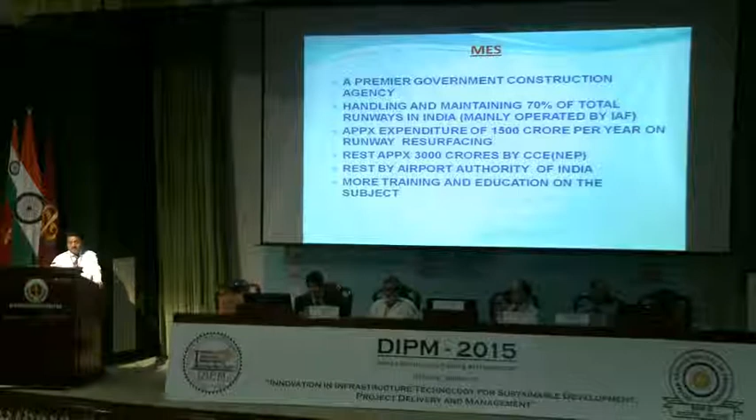I will just inform you that Panagarh, when I was posted, I actually never wanted to go there. But after reaching there, I could find out that it's a beautiful runway which was available there. But before covering my case study on the runway resurfacing work, I will cover MES and the runways.

MES, as all know, is the premier government construction agency. But as far as runways are concerned in the country, mainly there are only two government agencies executing runway resurfacing. One is MES, of course, and the second is Airport Authority of India. Almost 70% of the runways being handled, operated by the Indian Air Force, are with MES. That is 100% of the airports operated by the Air Force, 70% of the total Indian runways available. Rest are being done by Airport Authority.

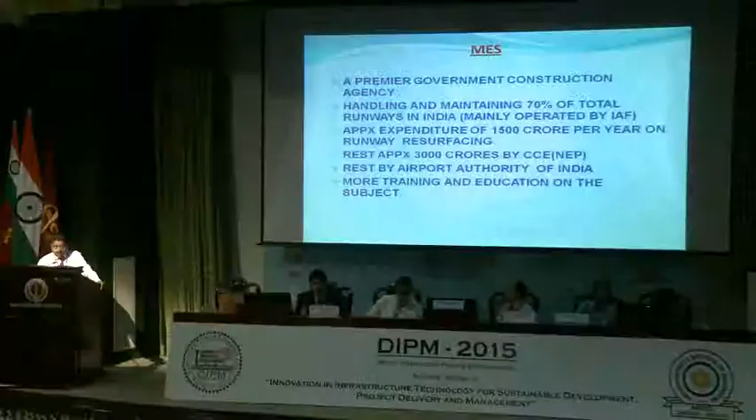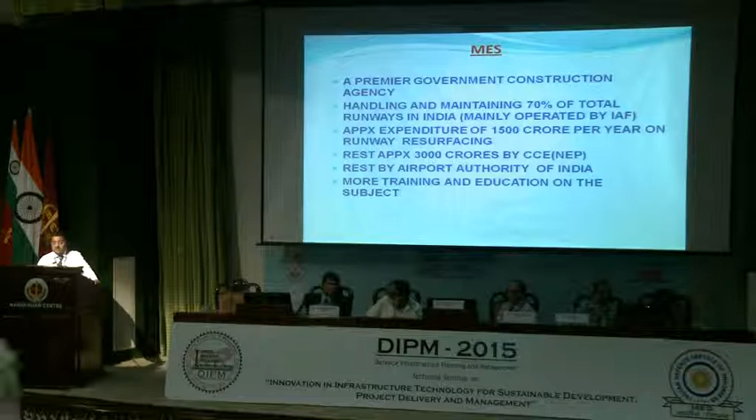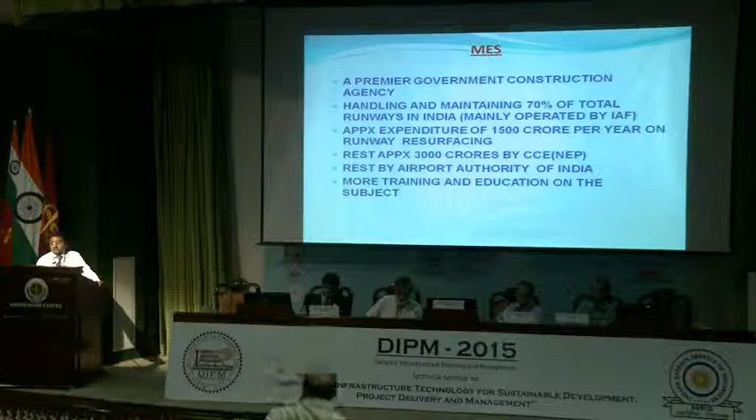But in the department, very little training and education is there for the executives, staff who are doing the runway resurfacing work. I am also not educated in the highway field, but got the experience because I had executed runway works in Ambala and now in Panagarh. So 2 runways I had already executed as GE, and 3 runways I had supervised as an officiating director design in WC Palam. Now coming to the project, which will be of quite interest for you.

First of all, the Panagarh Air Base, which even the name was not heard by me till the time I was posted there. This runway was constructed by the British and the US in World War II and has been used thrice during World War II and thereafter in 1965 and 1971, the wars against China and Pakistan.

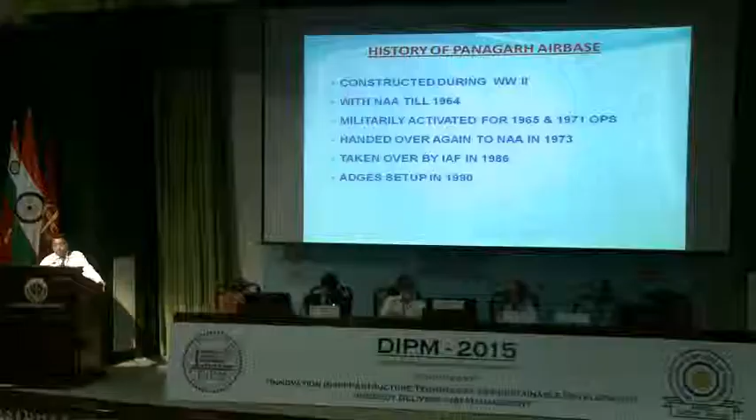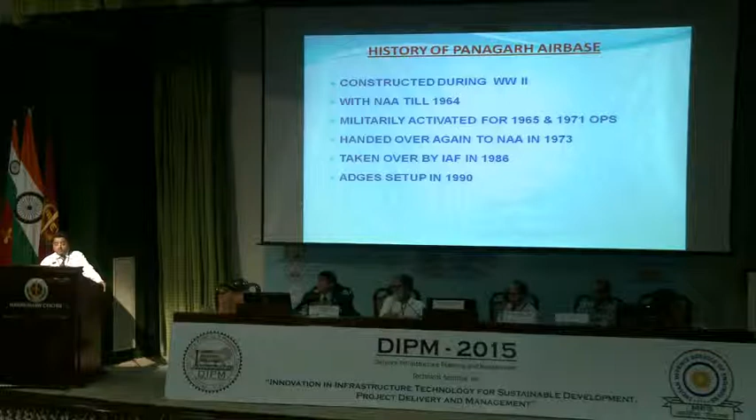The airport was taken over by National Airport Authority and Indian Air Force quite a few times, twice or thrice. Finally, in 1990, the ADGES setup was there, wherein all the runways of Indian Air Force are connected. And since 1990, Indian Air Force is operating from the base.

Coming to the project, it was sanctioned in January 2013 for an amount of 87 crores and completed in July '15 for an amount of 80 crores, in a total time period of about 2.5 years, out of which real execution time has been only 10 months. Rest was planning, taking decisions, changes between the Air Force, the MES and the contractor.

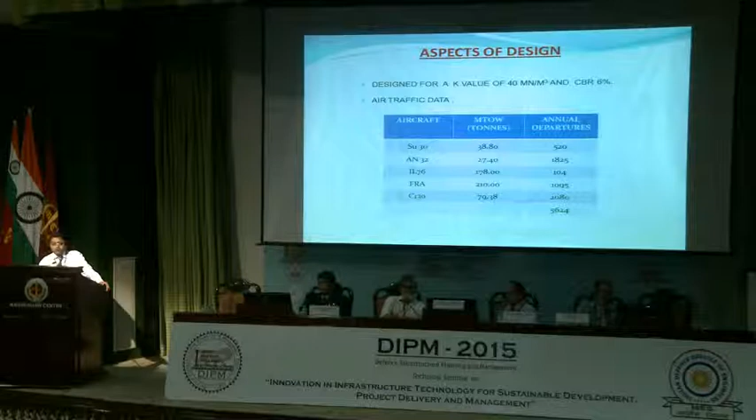Coming to the design aspect, this runway has been designed for the heaviest aircraft available with the Indian Air Force except the C-17. As you can see, the C-130J, the Hercules super aircraft, which is a multi-role aircraft, will be operating from the base.

Hercules C-130 has got only 2 bases. One is at Hindon, and the second one, now in 2017, would be Panagarh. Another 6 aircraft are being procured by the Indian government.

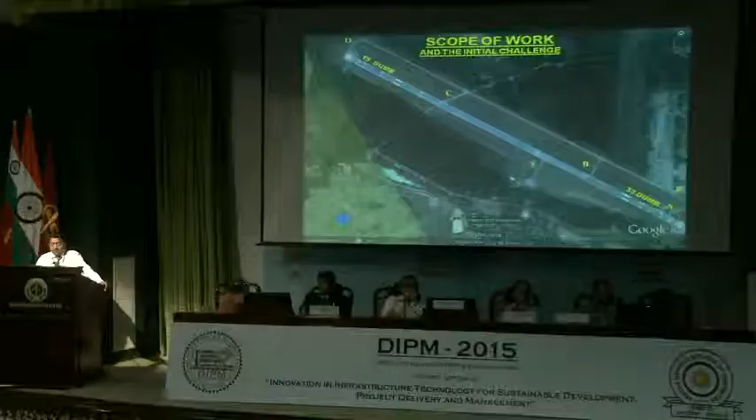Coming to the scope and the initial challenge, why there was delay initially in planning and starting the work. As you can see, this is the profile of the runway. This is the 15 dumbbell and this is the 33 dumbbell. For the knowledge of all, 15 dumbbell means it has got 150 latitude when the aircraft operates from this end. Meaning if the runway operates from 15 and moves towards 33, this line will make an angle of 150 degrees from the north of the earth. So that is how the nomenclature of runway ends are there.

This runway in 1942 was constructed with rigid pavements only; the whole surface was concrete. But as per our Indian Air Force requirement, the center portion of 2134 meters, that is 7,000 feet, was to be overlaid with flexible overlay. The rest of the two ends were to be overlaid with rigid construction, that is PQC, concrete construction. A further 900 feet were to be constructed new, with rigid ORA, and all other taxi tracks and links were to be laid flexible again.

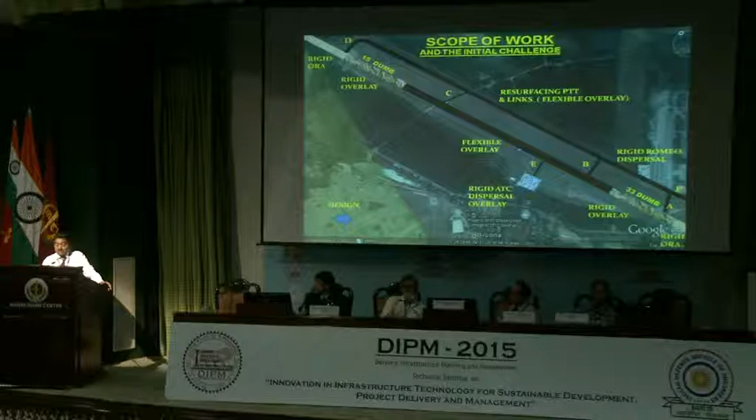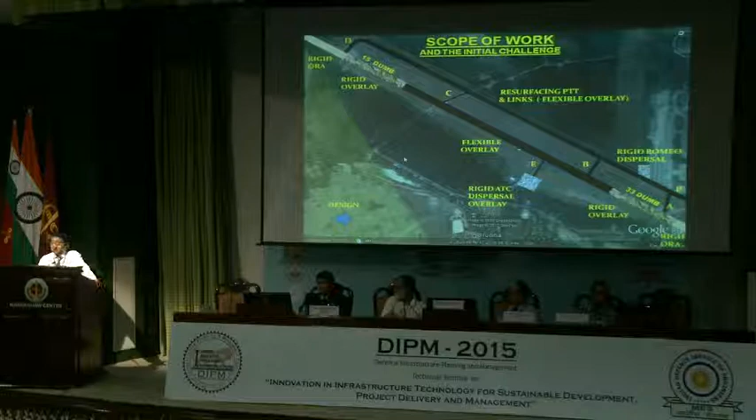And the two dispersals, Romeo dispersal and ATC. This design was done based on the traffic data given by Air Headquarters, by CCNEP at that time, and vetted by the Pavement Directorate of the E-in-C branch. I won't go into the details of the design because it will again become boring for you. In this, the initial challenge — I'll talk about all the challenges which came our way and how they were overcome.

There were small things, there were big things, but here is how they were overcome. First of all, the initial challenge which came before starting the work was about level.

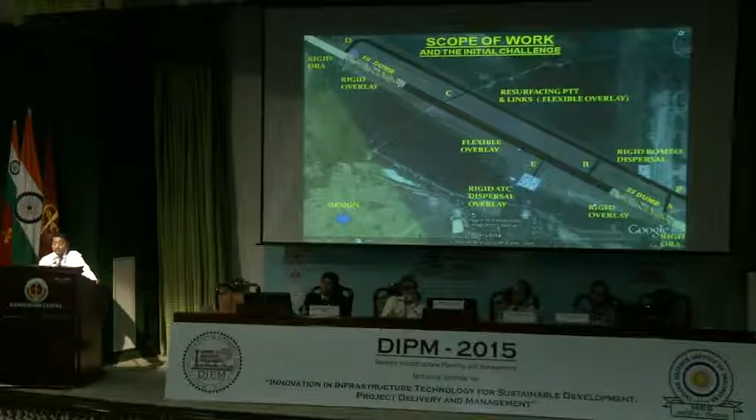The runway, when the leveling was done using a total station topographical survey at a grid of 2 meter by 3 meter, it was found that about 40% of the runway's length, from Echo Link up to the 33 end, around 1400 meters or so, was sloping towards one direction only. This was not allowed, as per ICAO guidelines of the International Civil Aviation Organization, the runway should be symmetrical on both sides and should have a camber of at least 1 in 100.

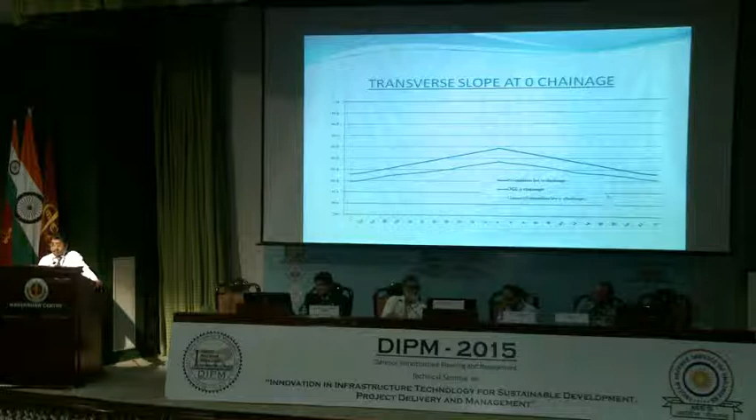To achieve that was a Herculean task, as will be explained in the next slide. You can see a graph made using MS Excel, as rightly pointed out by the earlier speaker in the morning, that MS Excel can be used constructively for doing anything. This graph was made using MS Excel with data fed into it. The bottom line shows the OGL, that is original ground level, and the top line shows the formation level which we had to achieve finally after the resurfacing.

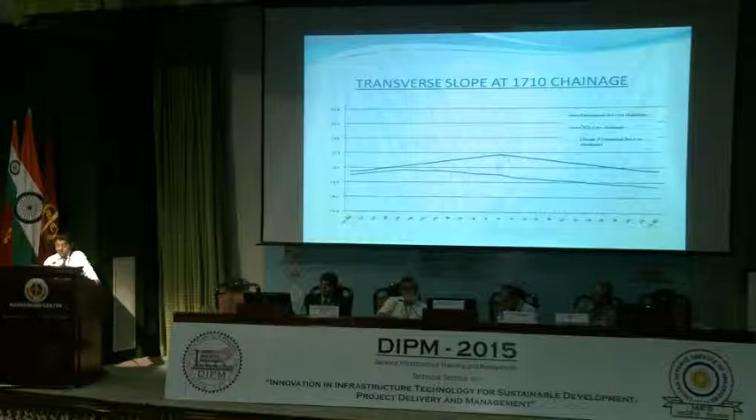Now here there doesn't seem to be a problem, but as we move from 0 to chainage 1710, you can see the ridge has moved from center to left, toward the PTT, toward the ATC side. The correction required to achieve this kind of cross section shape was around 200 to 250 mm. And further we go to chain edges, the correction amount increased. Now this was a challenge.

How to do it? Because maximum one layer of correction using DBM, that is dense bituminous macadam, could be 75 to 85 mm. Now this is the longitudinal profile of this runway. As we see, we generally go on a flight and see the runway and the aircraft flying. Generally the airstrip seems to be horizontal, but it is not.

Here in Panagarh, the lowest portion on the runway was on the 15 side, and the highest portion in the middle was around 7 meters higher, and similarly 5 meters on the other side, also having a ridge in between - you can see my pointer there. This was not allowed because as per ICAO guideline, the longitudinal slope of the runway should not be more than 1%, and rate of change in slope should not be more than 0.1% at every 30 meters.

To achieve this, a proper design was done using MS Excel, and FRLs were decided. After the FRLs were decided, in AutoCAD a diagram like this was made, as you can see in the bottom diagram - this is my layering chart.

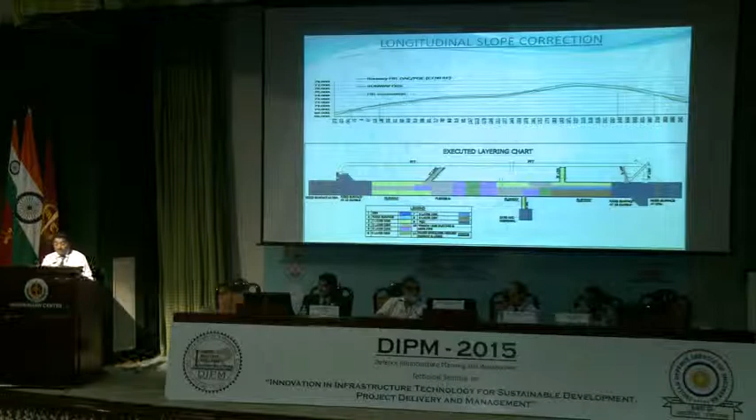This brownish portion shows 6 layers of correction were required here. Then the blue one shows 5, 4, 3, 2 like this, and the yellow one shows 1 layer of correction. So finally this was decided, this was planned, all the levels fed into the computer, and then only the work was started for overlaying the flexible work.

Now coming to the rigid work, as per Air Force practice and our MES practice, the runway on both ends were to be constructed rigid, that is with concrete. So 1000 feet on either side already existed as rigid, but on both sides the correction amount was too huge. To cut down on cost and effort, finally the decision was taken that all these ends will be broken and laid new.

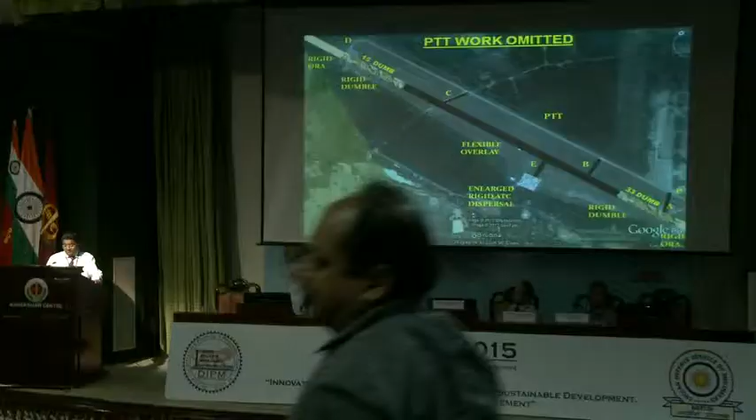I'll speed up because it's too much time. Let's go straight to the execution, then the conclusion part. Please increase the speed.

First of all, the flexible overlay. The challenge again was that the runway was 75 years old. The whole runway, according to the guidelines, had to be repaired before the overlay could be started.

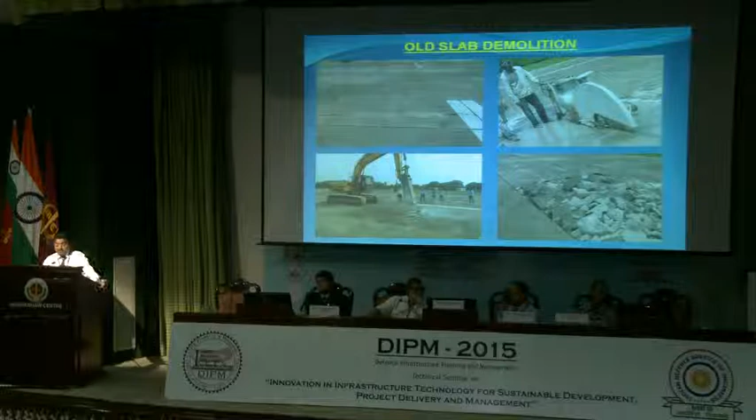You can see the old slabs were so broken - around 550 slabs were broken. These were repaired, all the old slabs were recast, and all the cracks and joints were filled.

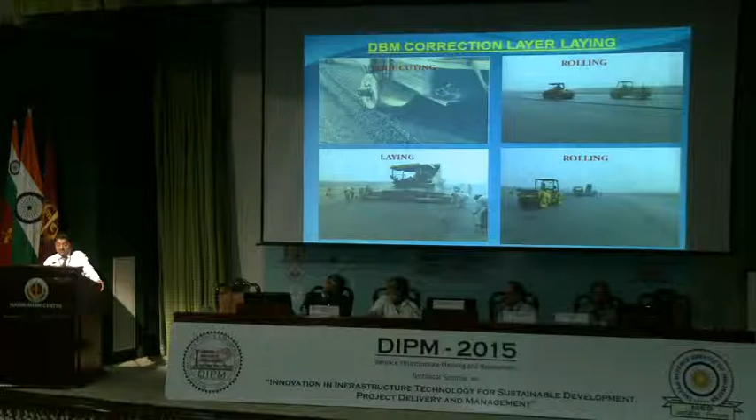Coming to the DBM correction layer, you can see, naturally every one of us has seen road work done with the same kind of paver, but this is a sensor paver wherein string lines are used to maintain the proper level as per the design fed into the computer. You can see one of the contraptions manufactured on site to remove the uncompacted portion of the layer which was laid.

Let's go over this quickly - Professor, please speed up on laying of glass grid in SAMI. Now just 4-5 points using PMB.

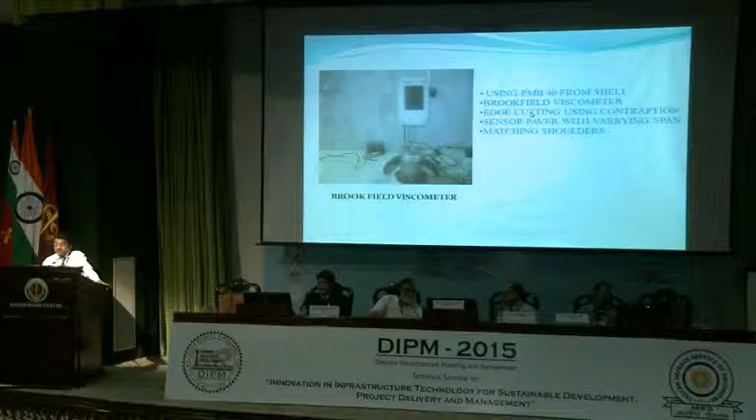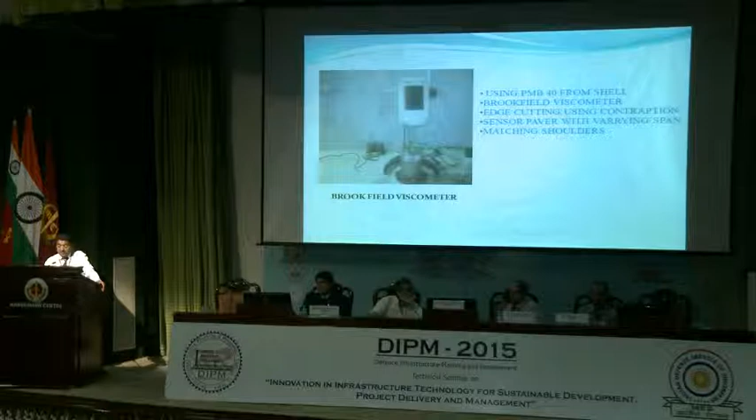How could we achieve the quality which is required? The runway is being praised by everyone. We used PMB 40, polymer modified bitumen from Shell. This is an instrument costing around 4-5 lakhs, a Brookfield viscometer, to know the viscosity of the bitumen. PMB 40 is a product which has a softening point of around 65 to 69 degrees centigrade. A sensor paver with varying span was used, and the shoulders of the runway were also of DAC, matching the main surface.

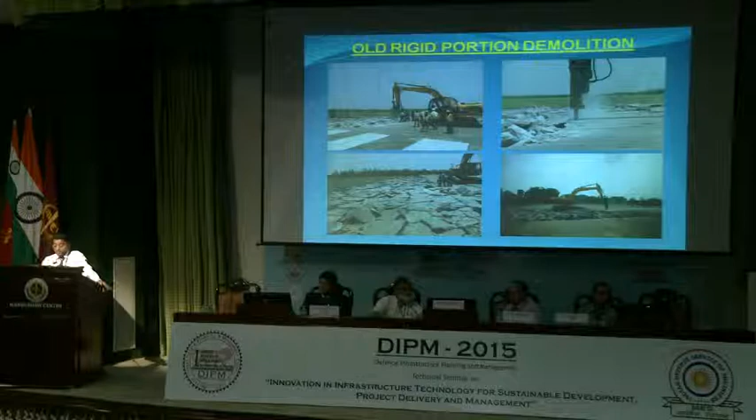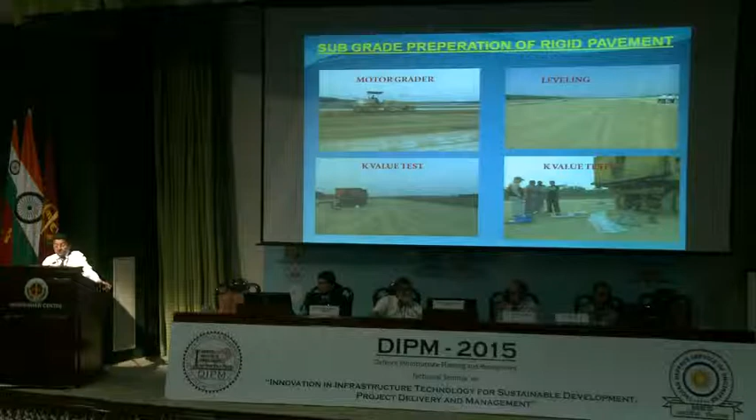Coming to rigid reconstruction, which already was decided, the whole of the runway, 1000 feet, was broken and removed to the dumping site. All the aggregates were pulverized for use in subgrade preparation, laying of GSB, and laying of DLC.

I would like to emphasize that DLC also has been laid using a slip form paver. Slip form paver is a machine which is a level control machine. The levels are fed into the string line and then it moves. I'll show you in the next photograph.

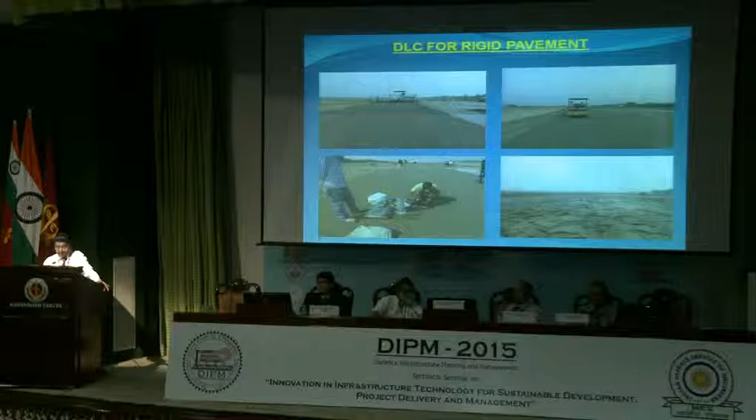This is the capability of the slip form paver, wherein around 25 inbuilt needle vibrators are installed. This kind of cake-like concrete can be laid with it, having 0 to 10 slump with very low water cement ratio using admixtures.

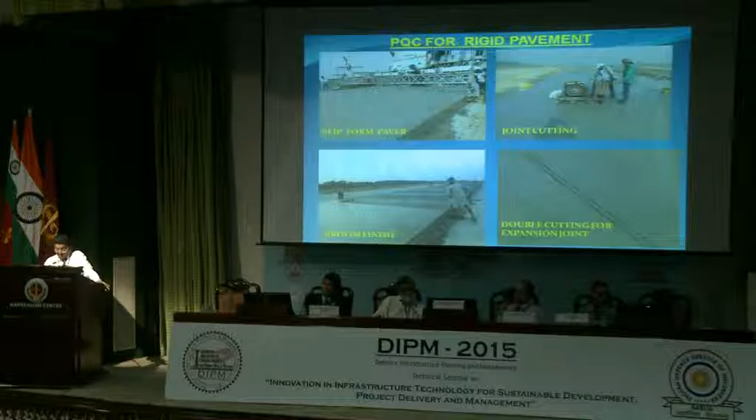Herein we had laid the concrete continuously, and the expansion joint was also cut by giving a double cut at a distance of around 8 to 10 mm. Then the middle portion is removed and other things like expansion pads and polyurethane were inserted.

Certain points are to be remembered before going for PQC, because this is the top surface, and top surface in Air Force causing any FOD, foreign object damage, is not allowed. Even the smallest of cracks or smallest of edge broken is pointed out by them, because their aircrafts are FOD prone.

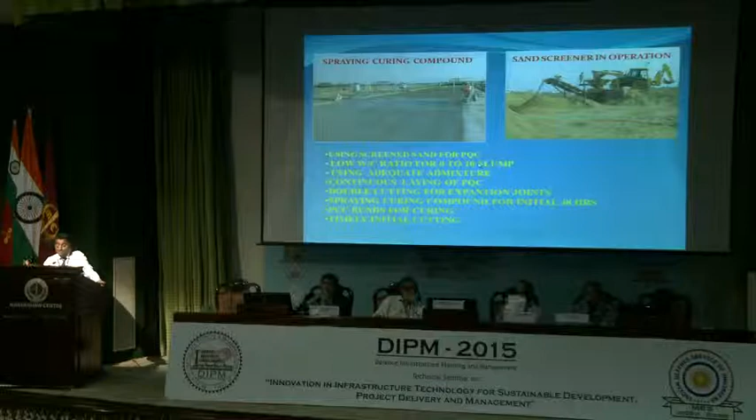So for allowing maximum benefit, this sand screener, as you can see, has been fabricated on site and was used. Complete sand used in PQC has been screened through a conveyor belt, and then used in the PQC to avoid small potholes which come over the surface of PQC because of lumps in the sand.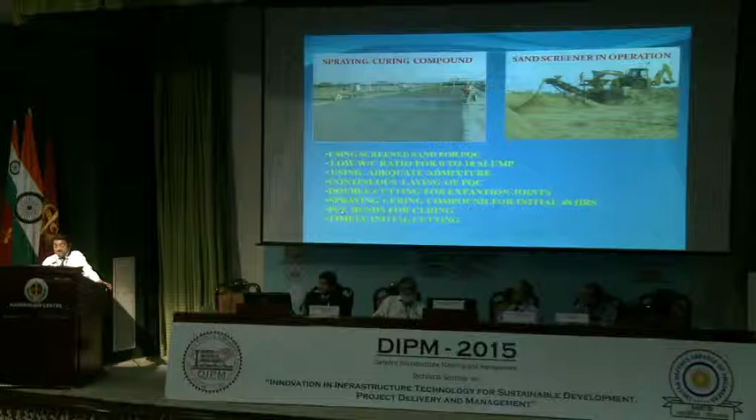Low water cement ratio, as I told, and a slump of 0 to 10 was produced using adequate and proper admixture. Continuous laying of PQC was done. Curing compound was sprayed for initial curing for 48 hours, and PCC bunds were used for curing, not sand bunds.

Coming to quality assurance, as you know, in MES mostly people are afraid of going as GE for runway resurfacing work, but that is because of less know-how about it. If we go for quality assurance as in MES, it is already built in. We follow a 3-tier system of testing. Before the source is identified in the contract, it is specified in the contract, and we test the source material also.

We use the best design mixes, and we test the end results also. Also, the supervision system is a 3-tier system, as is already there. I'll show you some photographs and just finish off.

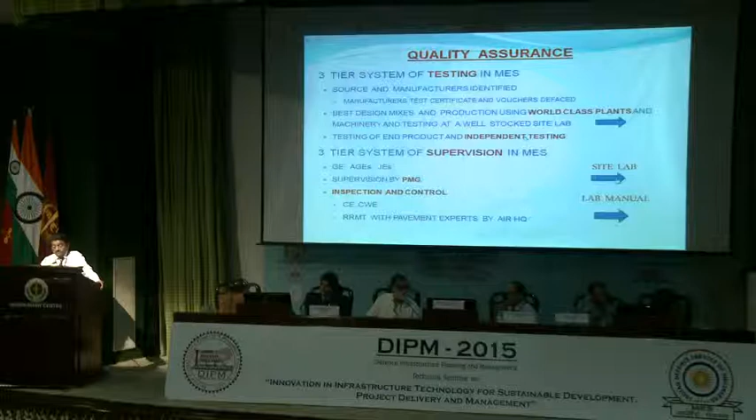Very good photographs, excellent, thank you sir, thank you very much, worked hard. Hey, very good, very good, very good. With due regard to our senior who is 75 years, I must compliment that spirit of learning and sharing.

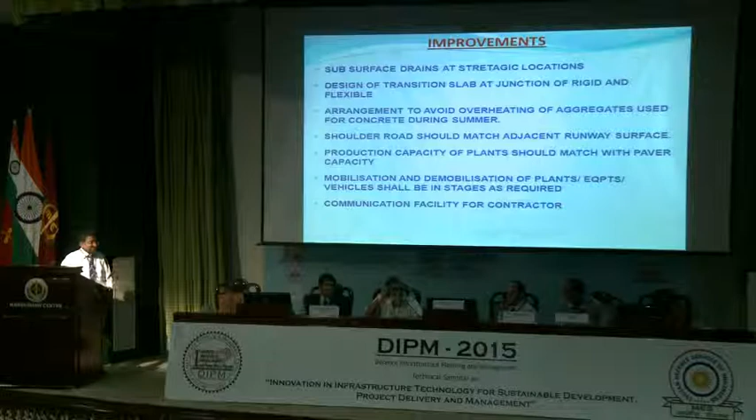No, it's a bit different, interpret it differently, but what you are saying is also correct sir. The contract was only 76 crores, but actually because of the speed, I had to cut down many things. Actually we had not cut down, just one thing. That saving was because of your better planning, or was it a part of that contract that we charged less? It was because of earlier planning, sir.

But we had left half the portion of work, we had done only the runway. So was it your contribution or not? Yes, it was your contribution, but only part of it. Okay, but did you get any recognition?

No, that's just how the system is, there is no recognition system. Actually, the system has to be questioned, he has not been punished for any of these things, that is the reward. No, it's not like that. With due regards, at this age you should not talk negative. Sir, the building where you are sitting here, I was the man who was about to be punished for building this, but you were not punished. Luckily, God has been kind. Sir, it's not all luck, everything is not luck. Let us say I was about to be punished, there is negative as well as positive.